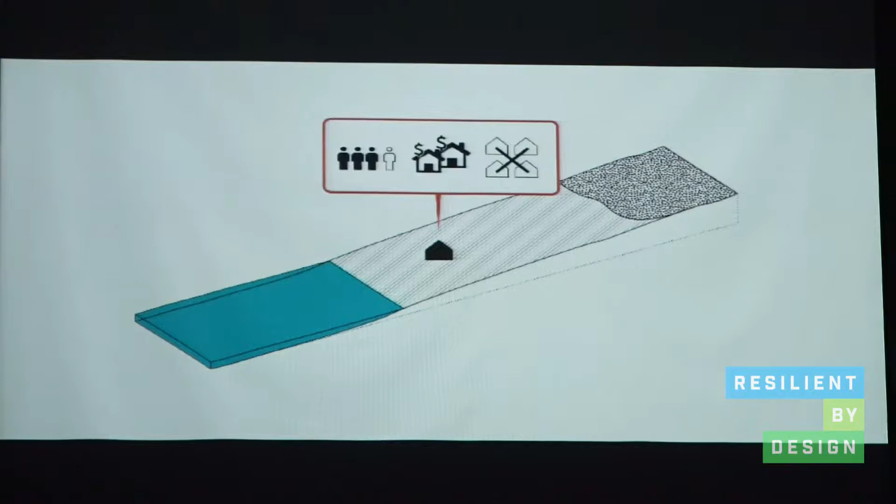We began this process by asking questions. What is home? What are the boundaries of home? What are the places we love? What will our home look like in the future? The Bay Area is in crisis. When large groups of our neighbors can't afford to live in their homes, then the model for living in the Bay is broken for all of us. Many of our most vulnerable communities, those enduring poverty and structural racism, also live in areas that are highly susceptible to sea level rise and flooding.

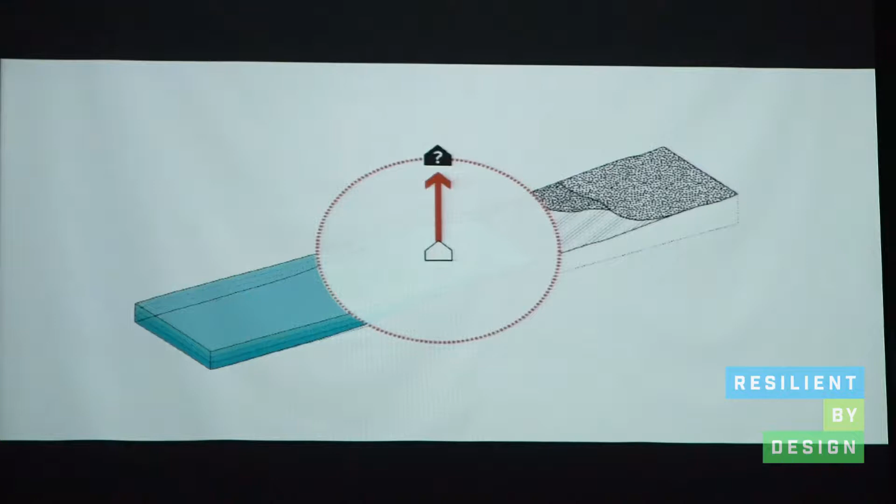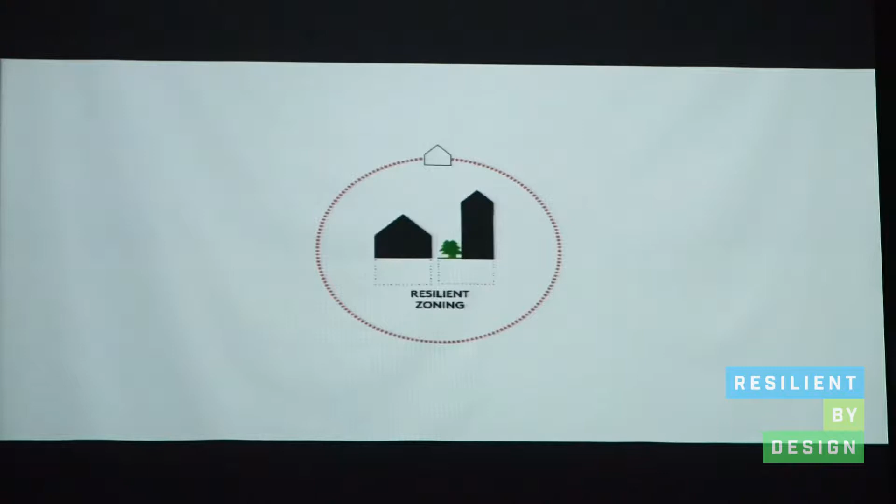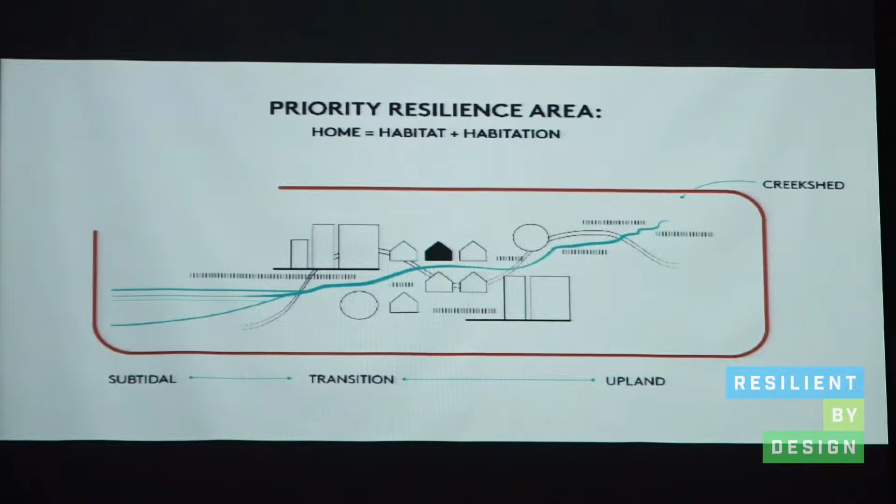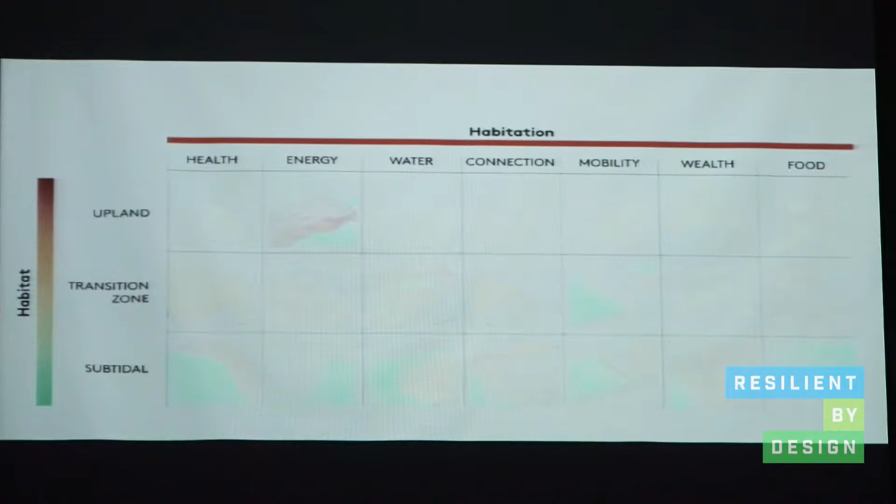We need solutions that allow neighborhoods to remain in place and thrive. We must produce more housing, preserve low-income housing, and protect residents from displacement, while improving the quality of neighborhoods for everyone. The home team proposes the creation of priority resilience areas where new ideas of home emerge from a healthy and dynamic bay ecosystem. New regional patterns along the bay edge intertwine the health of the bay and the health of our neighbors. Working in partnership with community members, we will use design as research to take on challenges and create opportunities for communities to relate, adapt, and thrive.

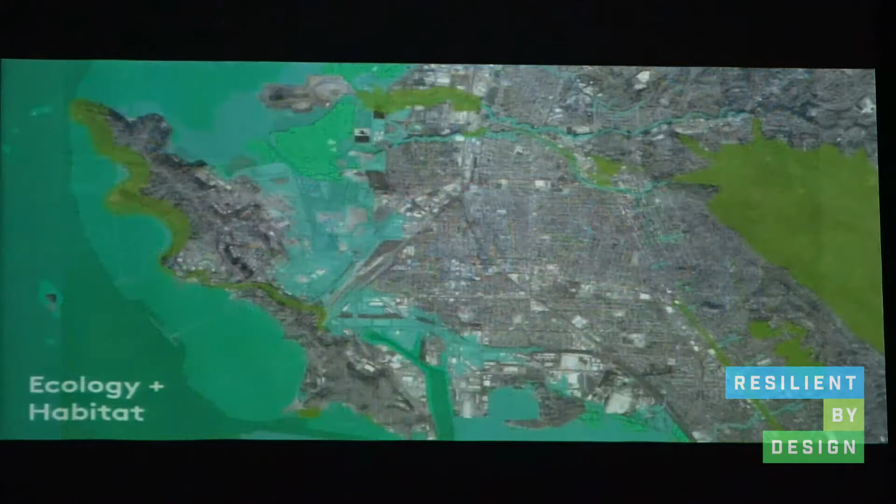North Richmond is a place of historic racial inequity. African Americans who arrived in the Bay for the World War II shipbuilding effort were forced to settle in the low-lying area, cut off from other communities by railroads and infrastructure. The community is well organized, developing a North Richmond vision plan, programs at the Verde School, and greening projects with Urban Tilth.

Green infrastructure and floating trails can address flooding while enhancing quality of life. By improving walkability and bikeability to BART and the ferry terminal, residents can reduce commute times to re-engage with bay nature at Point Molate as part of a daily routine. Horizontal levees and improvements to wastewater infrastructure open up opportunities to build new, permanently affordable housing.

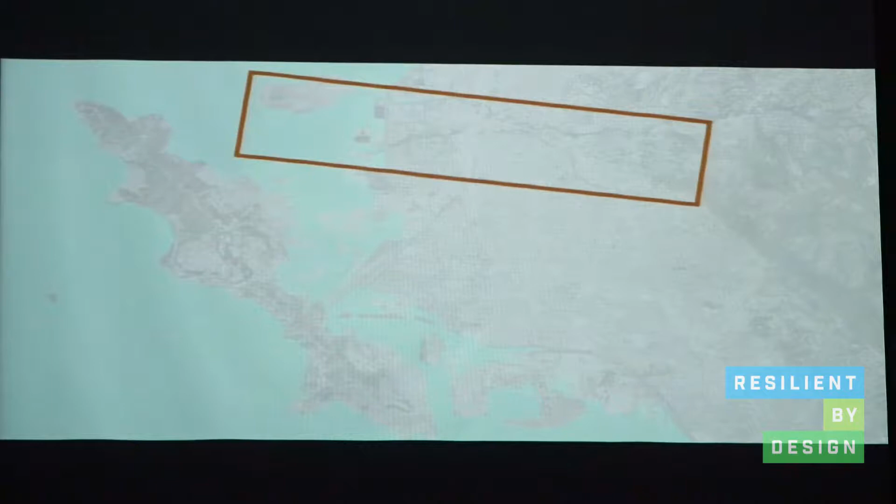The community and the ecosystem will thrive, catalyzed by an urban ecology business incubator that is a source of jobs, innovative housing, and a clean energy park on the site of the former landfill. In the near term, the North Richmond Water Reclamation Plant can provide treatment with constructed wetlands, allowing for pocket marsh connections that are healthier for the bay edge. As waters rise, the constructed wetlands transition to salt marshes to augment the bay's estuarine habitat.

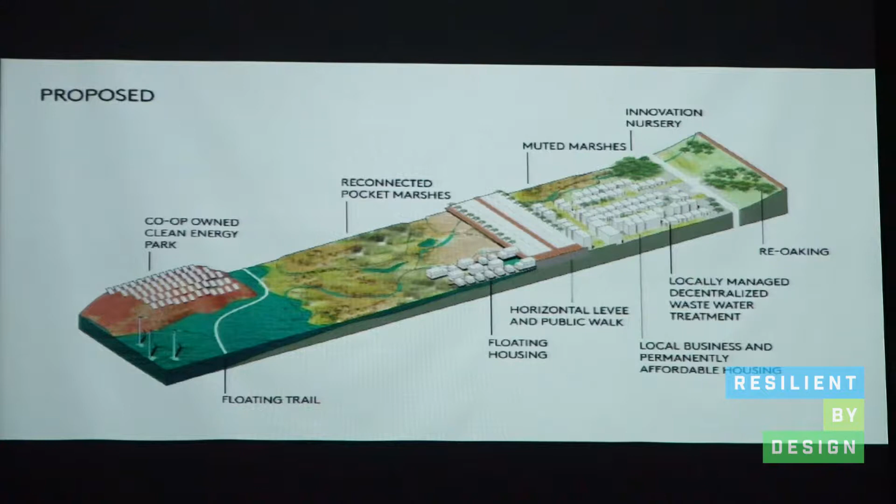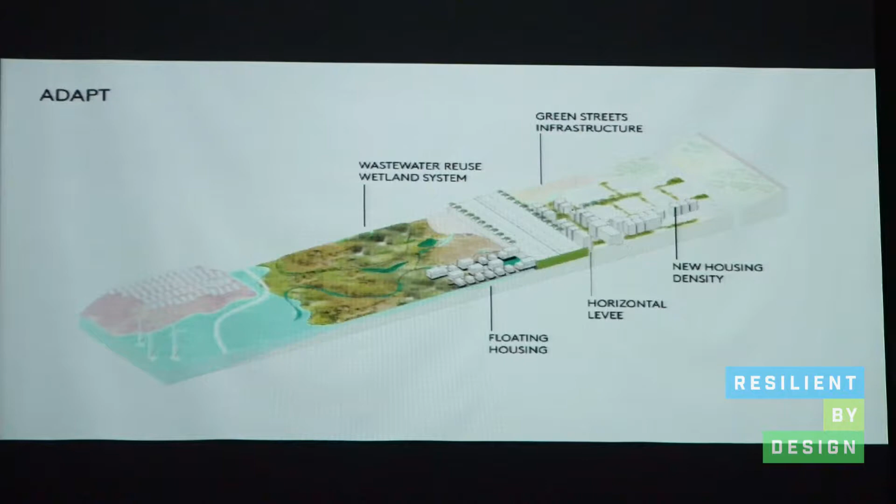Looking 20 years out, decentralized wastewater systems can be located in each neighborhood. These wastewater systems look like greenhouses open to the public. They can also process increased nutrients and return clean water to the bay. As infrastructure is relocated to inland conditions, the waterfront is freed up for new floating housing and ecological restoration.

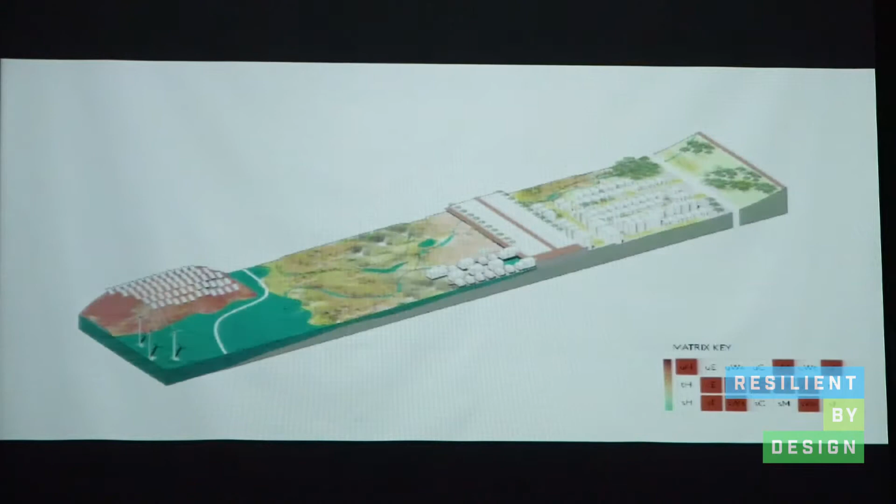Students from Kennedy High School in Richmond have shared visions of healthy food, floating homes, rooftop gardens, and multimodal transport. Stacking funding sources for ecology, wastewater, and health can support this neighborhood transformation, a priority resilience area in North Richmond.

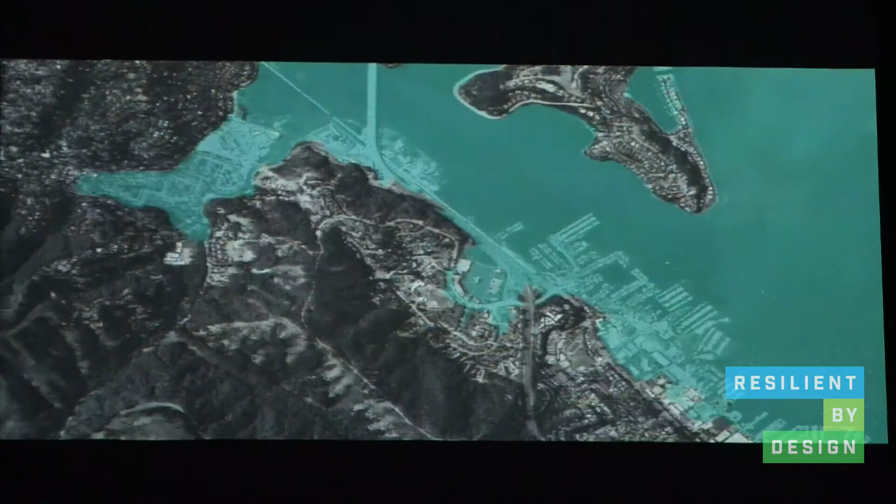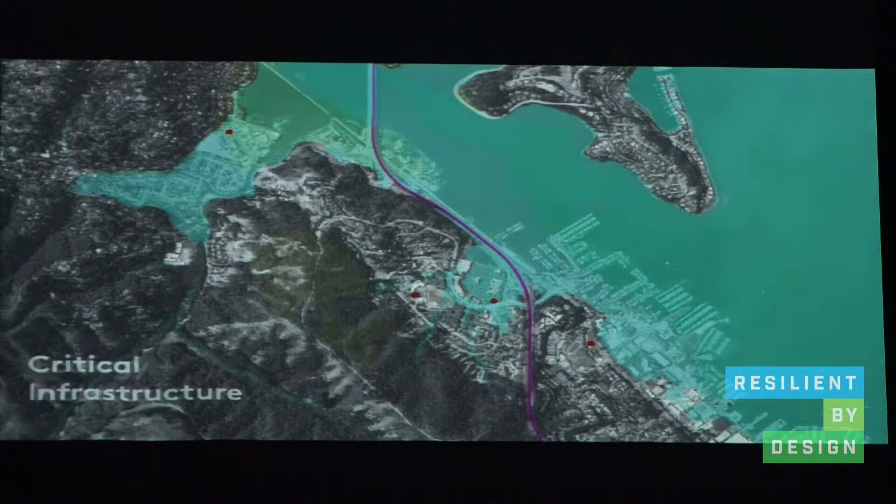Marin City residents are well organized and tight-knit, yet constant flooding and deep health disparity highlight inequity within one of the nation's most affluent counties. Improvements to Highway 101 can mitigate its regular flooding and catalyze positive change in Marin City. However, it is essential that the existing residents not be displaced. People here have experience with things not working out in their favor. New economic models need to come first for producing, protecting, and preserving housing.

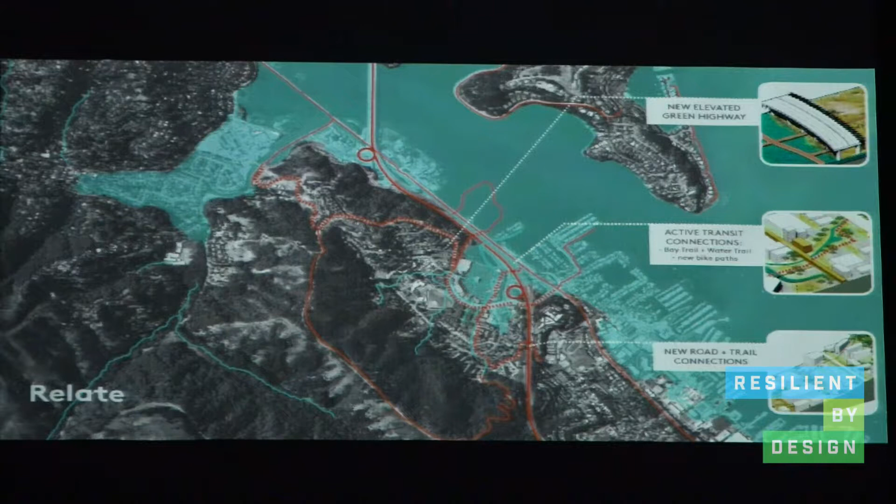We propose elevating the low-lying portion of Highway 101 to provide a critical second access point to Marin City. A new horizontal levee and marsh areas will adapt to rising water while supporting new affordable houseboat cooperatives. Proposed creek restoration and street retrofits with green infrastructure will help reduce upland flooding. The community thrives as new housing and jobs come to Marin City, and a community reinvestment fund directs revenue to support projects with community benefit, such as an enhanced community center and a community-owned clean energy microgrid.

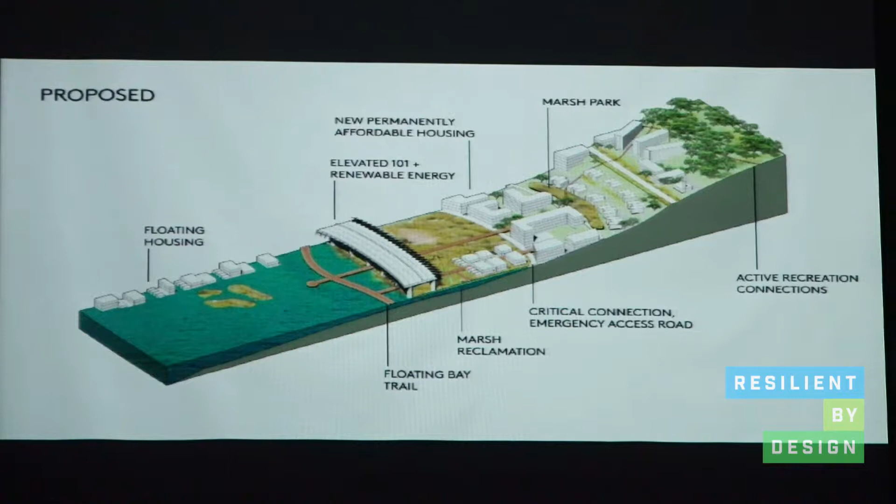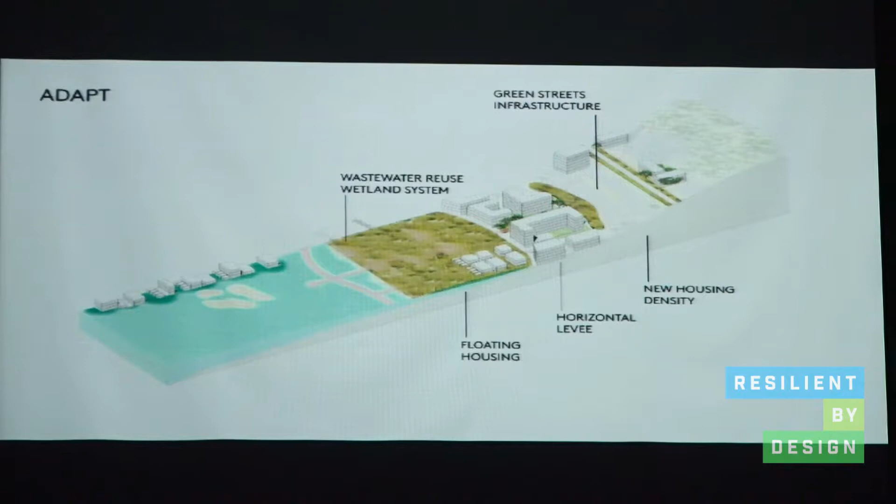In the short term, the highway median can be redesigned for flood control and provide an immediate response. A raised bay trail can be designed to be part of a new horizontal levee that phases into tidal marsh as sea level rises. In 20 years, an elevated Highway 101 and a reconfigured shoreline support development of a new mixed-use center, providing jobs, healthy food, and permanently supported affordable housing along a living shoreline, with houseboats and a new expanded tidal marsh. Residents, hikers, bikers, and tourists use new trails and floating bridges to move easily between Sausalito, Tam Valley, and Marin City.

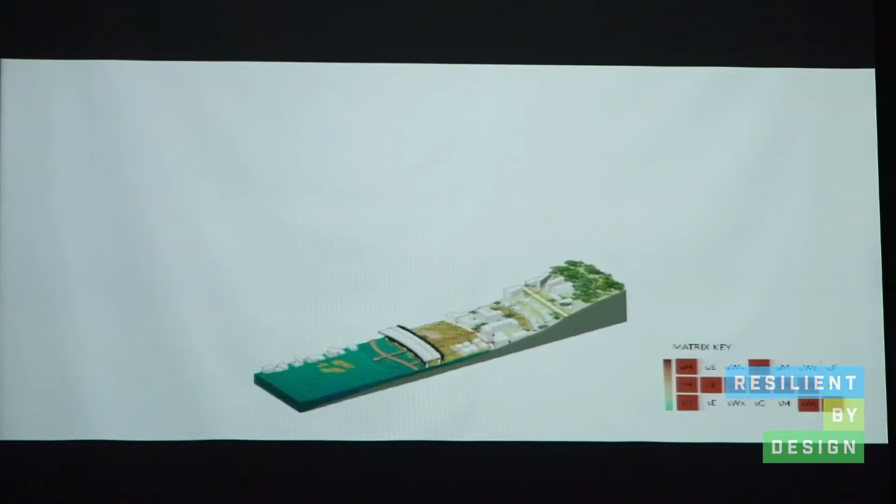Resilience investments are a catalyst that can include many co-benefits, such as space for a flea market every Saturday in a new floating town square in this priority resilience area in Marin City.

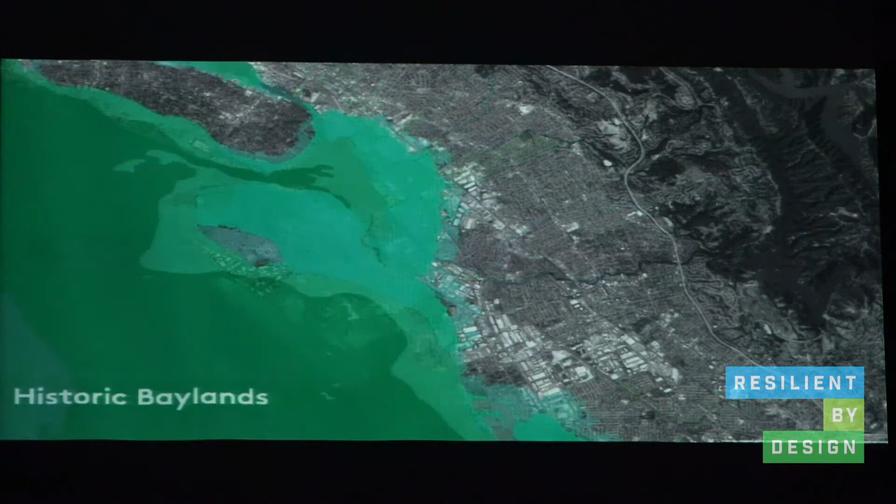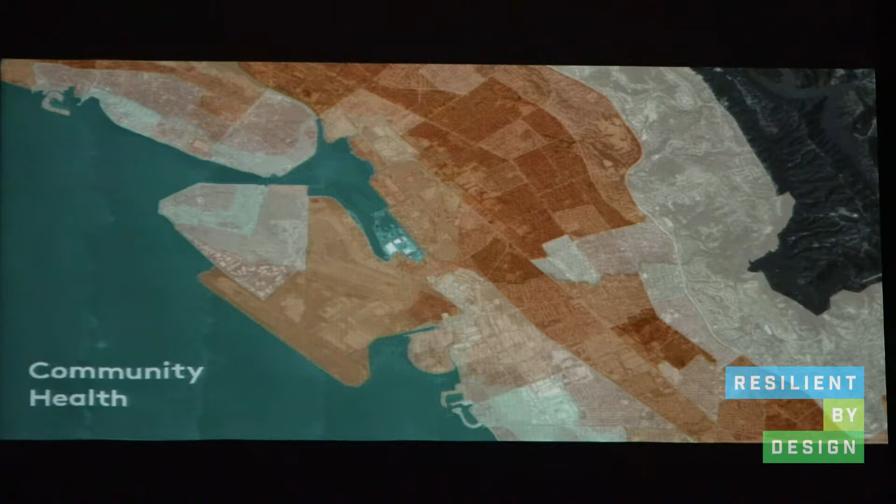Neighborhoods in East Oakland have motivated community organizers with adopted master plans for San Leandro Creek and Arroyo Viejo and a strong citywide resilience plan. But the challenges of racial inequity are clear. Between 2003 and 2013, a young black man in Oakland was as likely to be killed in gun violence as he was to be prepped for college. Our team is committed to a process that recognizes the urgency in that disparity.

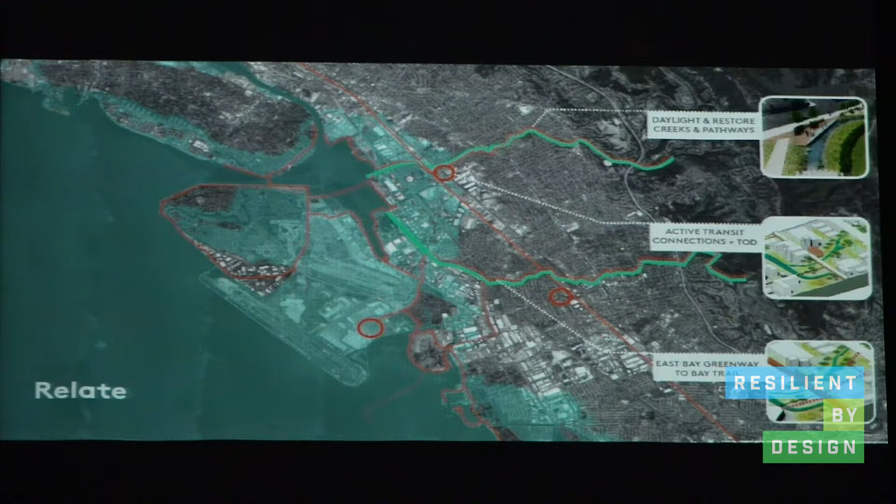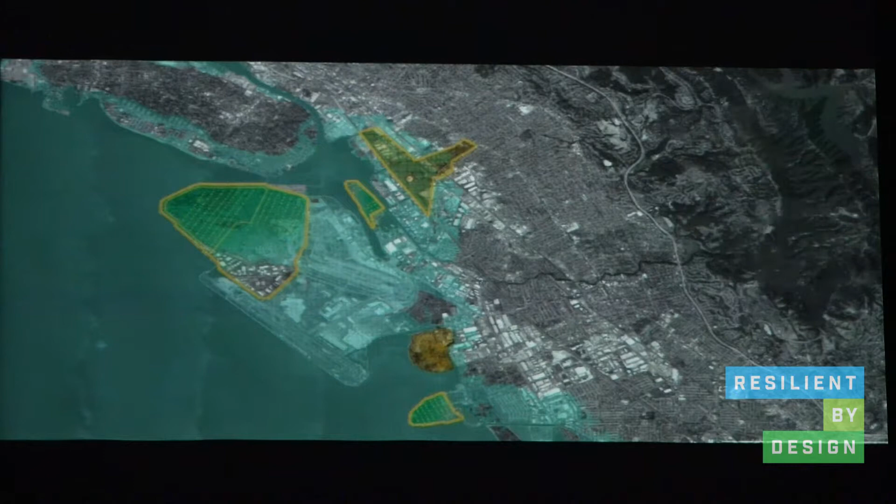Adaptation can occur as the Bay Edge is restored, with transfer of development rights and community land trusts supporting development of permanently affordable housing for a mix of incomes, including the missing middle, in mixed-use neighborhoods that include local jobs and access to healthy food. A community-based clean energy microgrid, a decentralized wastewater system, and transit accessibility could contribute to more inclusive neighborhoods with shared wealth building.

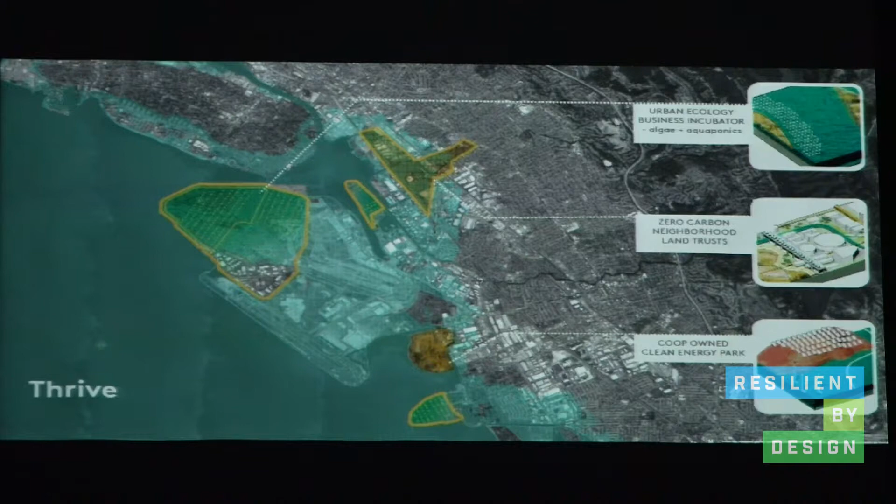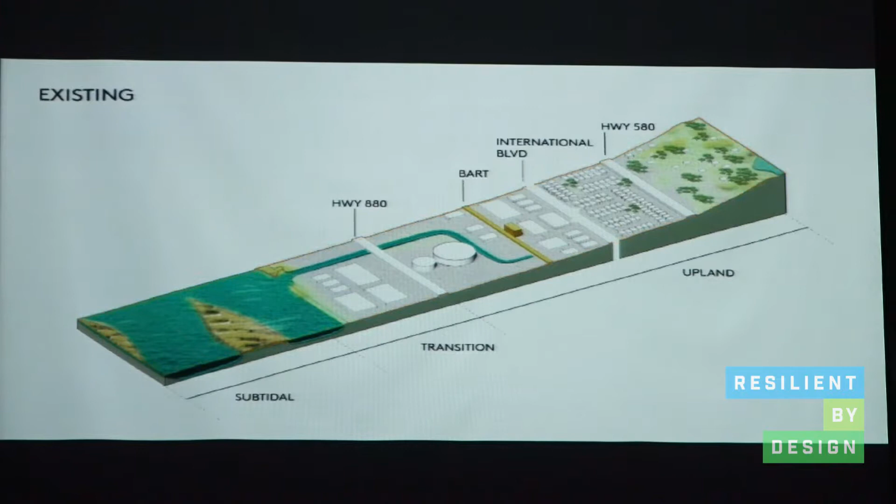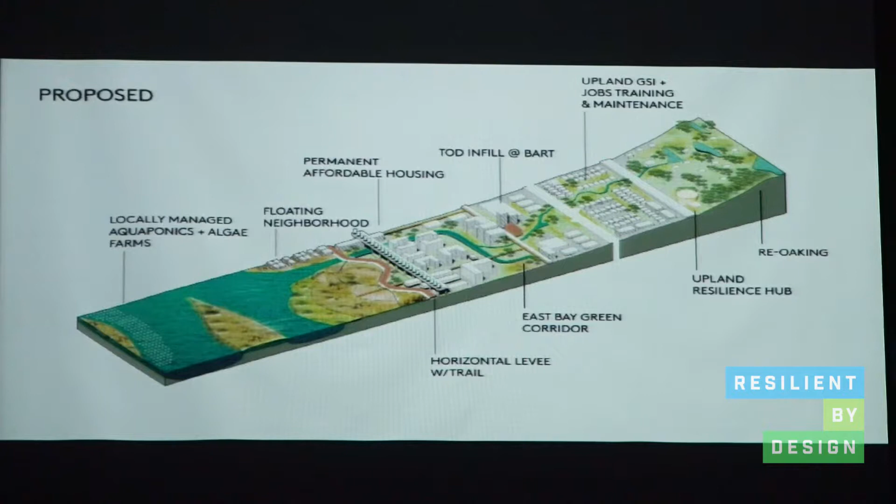A 20-year vision includes a horizontal levee along the 880 freeway, protecting that essential transportation asset while creating a valuable site for mixed-use, mixed-income housing that supports estuarine life with muted marshes behind the levee. From day one, the trail system can be the framework for mitigating upland flooding with rainwater collection along the creek, in neighborhoods, and along arterials to slow flooding.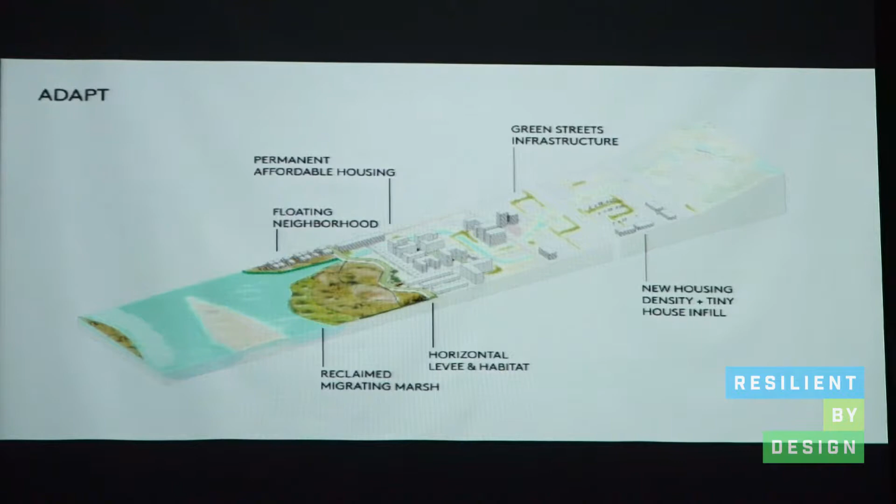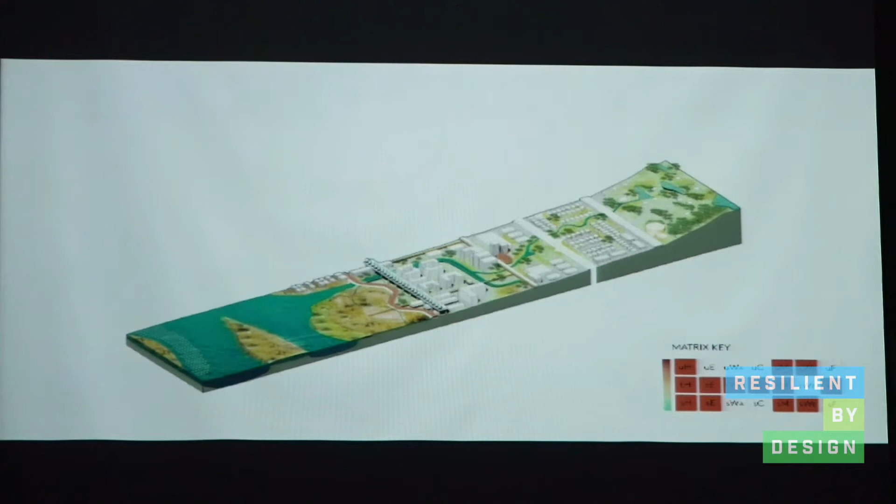Opportunities to daylight creeks can be combined with new housing that supports a thriving riparian ecosystem. Investments to improve the site ecology will be made to maximize community benefit while catalyzing development of new, healthy, mixed-income housing in this prime transit-accessible priority resilience area in East Oakland.

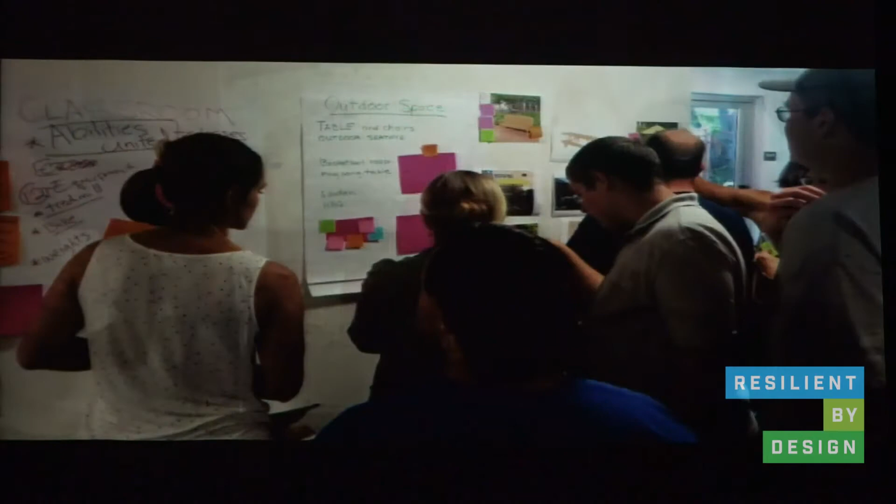No one is better at defining and mapping assets and liabilities than community members themselves. The Streetwise app will be an important tool for residents to highlight strengths and barriers from their perspective. Our work with the community will also include prototyping, the piloting of community-driven ideas initiated at relatively low cost, developed in partnership with educational institutions, and can jumpstart the transformations. We look forward to working with the neighbors to hear the stories, understand the hopes, and collaborate on design that strengthens the foundations of home.

All right. So through this collaborative research process, it's been so rich over the last several months. Our team has gained such a deeper understanding of the broad scale and the multifaceted capacity to the challenges ahead of us, and really put the work we do in urban design and sustainability in a much deeper and more grounded context. And like so many of the other teams, we engaged in a very involved mapping process, which revealed a series of kind of critical hotspots as we saw them.

And shown here on this map is an outline of some of the potential of these priority resilience areas. We see the need for interdependent and bioregional based solutions that address these regional connections, but ultimately happen at a local scale. And the question we ask continually is, what is that scale, and what's the sort of sweet spot between the local neighborhood and the region? And we feel it is this creek shed. So shown on the map there are probably 18 to 20 or so sites where there's high potential for replicability among these new, what we're calling the priority resilience areas.

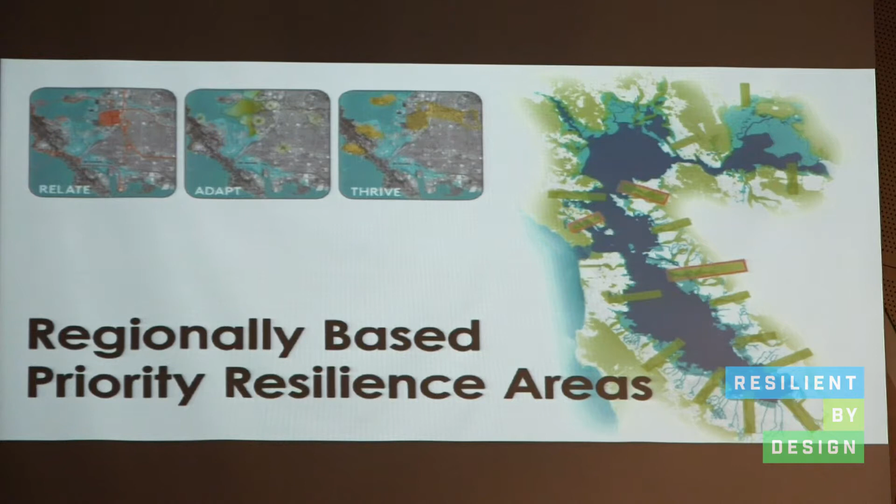And taking it a bit further, the strategy of Relate really pertains to connections across boundaries. So this is transit and pathways. And the strategy of Adapt pertains to new land use patterns, including home interwoven with ecology. And the design strategy of Thrive is really about equitable business models, so new land trusts and cooperatively owned district systems.

Key for our team, and so many have spoken about it today, is that we must start at these communities who are most vulnerable, and not just because it's the right thing to do, but because there's a really fascinating sort of overlay of lever points as we see them that could become the catalysts for broader change across these PRAs. And this investment opportunity is a chance to look at problems and positing that they are actually the points of the solution. So often the barrier that's the freeway or the raised divided highway or the polluting refinery plant can be reimagined on that site in that community for direct community benefit. And we see this healing gesture of sort of subverting the legacy of environmental injustice as really critical.

And we heard this echoed by the North Richmond students when we brought them to our office to do some design workshops. They were most excited about some of the green streets and ideas of growing food on vacant lots, reimagining the adjacent refinery into clean energy in their backyard.

And we see this home opportunity as a way to really elevate the best practice in the housing industry. SPUR and other groups constantly talk about the preservation of existing affordable deed-restricted units, the protection from gentrification and displacement, and then produce more housing so that we can build our way out of this immense deficit in the Bay Area. But it's also to sort of couple that with how are we building and what exactly does that housing look like, and what are the new forms that have yet to be really market tested? Additionally, these need to be redesigned with nature, regenerating with whole systems, and reweaving hybrid ecologies.

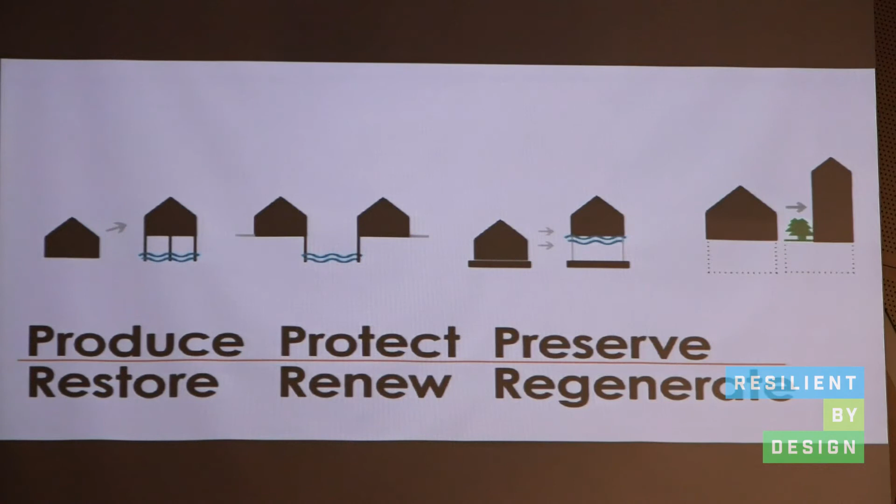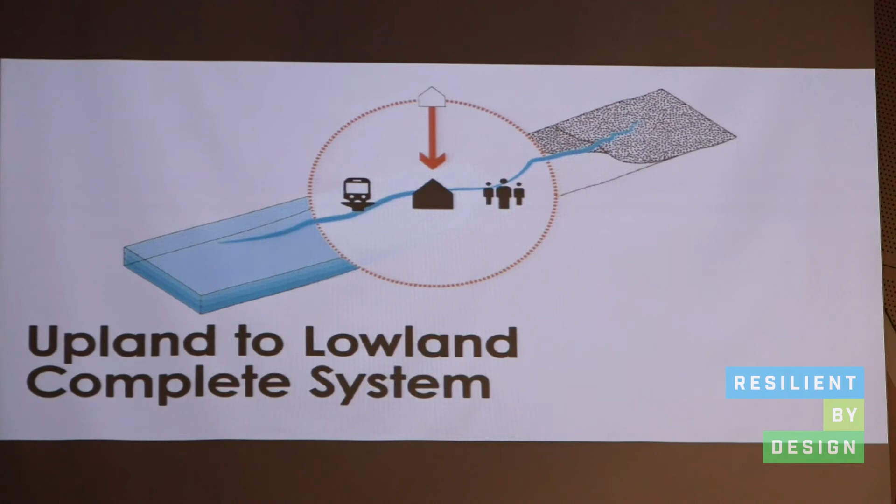Ultimately, this is for us about adapting in place and ensuring that the dynamic, changing cities, which are always happening around us very quickly, don't lose a sense of home and a sense of place as this occurs. The habitat and habitation matrix that we developed really as a generative tool became so much more, and home is the true synthesis of these two. It's the blending of creation of habitat for other species alongside our own human habitation needs. And we're really excited to get into the details of what some of this looks like, thinking of floating housing pier structures, which double as reef and biomimicry habitat for critical indicator species in those particular ecosystem districts.

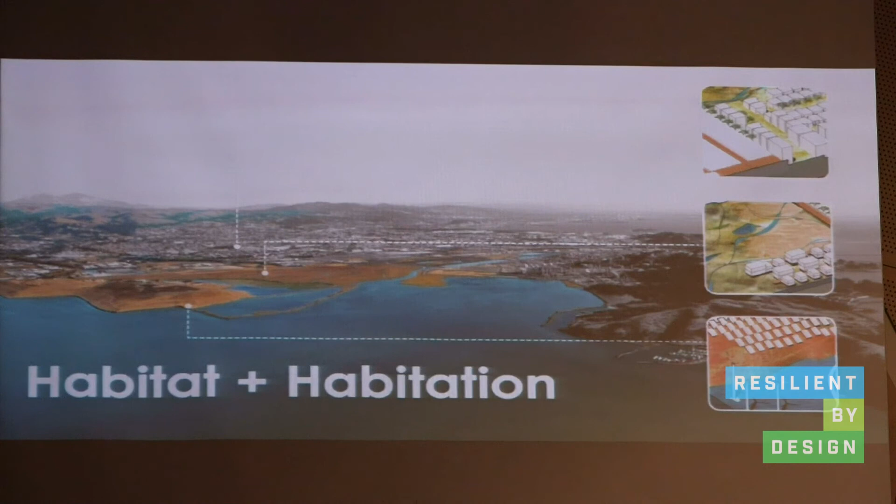And ultimately, the process is going to be long and hard, and it has to include capacity building among agencies, among stakeholders and the community itself that we're working with. We're talking about 3 years, 20 years, and 100 years. So we know that the process is as important as the outcome going forward. With that, we're really optimistic. We see just so much wealth of ideas and opportunities and stacking of co-benefits going forward. And thank you to all of the stakeholders through this process who have brought so much to the table. We're truly standing on the shoulders of giants to move this forward.